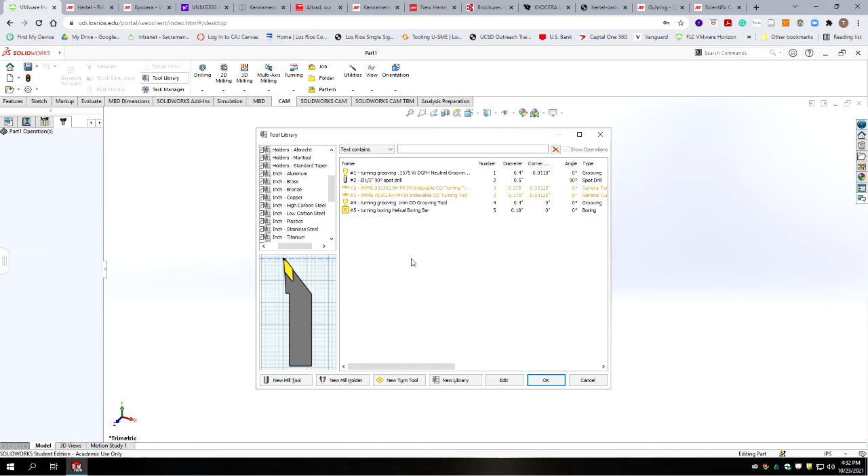So we're going to go back to our library, and we're going to do a right click on tool number 3, and we're going to duplicate that tool. Right now it's giving us an error because we have two identical tools in there. So let's go in and edit the second one.

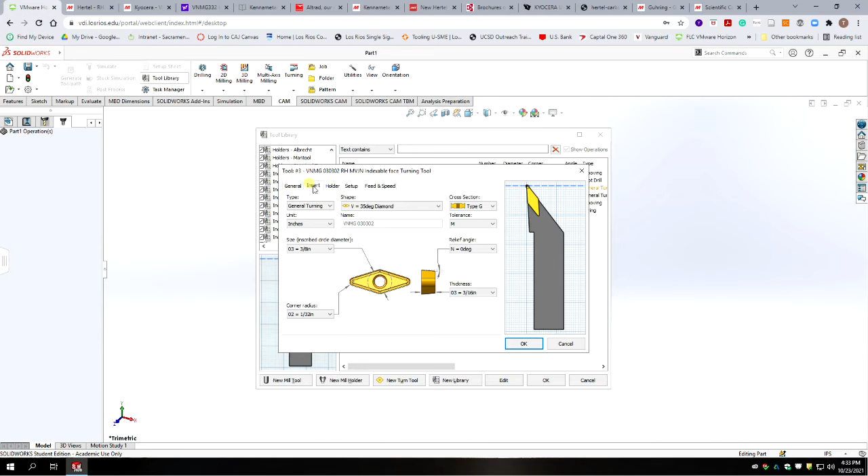We're going to say edit, and in general we're going to call this a facing tool. So face turning tool. Okay, this has got a different name, same part number. We're going to go to our insert, that's going to be the same. The holder is going to be identical.

Okay, and our setup though is we're going to be facing the spindle in this case. And we're just going to leave the feeds and speeds. Okay, now we shouldn't have a conflict there. Alright, so now we want to take that same exact tool and make a left-handed version of it. So we're going to duplicate it, we're going to get our warning, and we're going to go into edit,

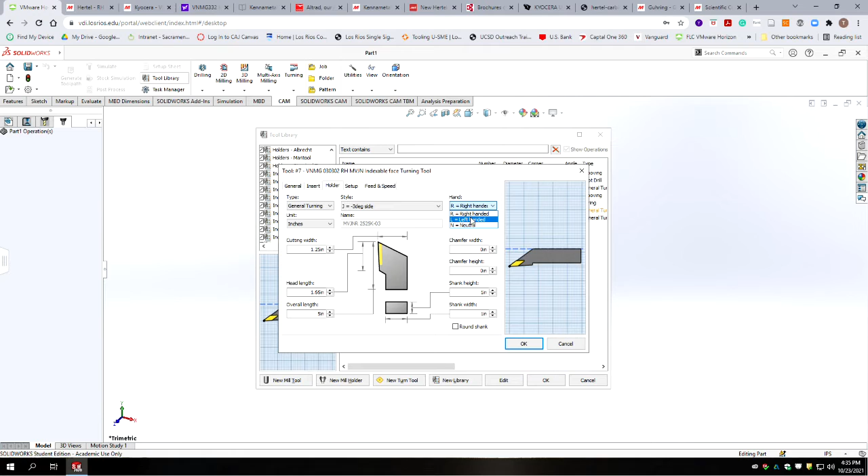and we're going to go to tool 7, and then to the holder type, and we're going to keep everything the same, but make it a left-handed tool instead of a right-handed tool. It's still made by Hertel, but the part number is different because it's a different orientation. So the insert's the same insert, but the holder's different.

So we're going to go back to our tool list and look for the left-handed version. Again, the insert's the same, but we need to put in this number, this one here. We're going to copy that URL and replace this one with it. Actually, the way MSC does it, you could have just replaced the end of it, which is the number, and you would have got the right thing.

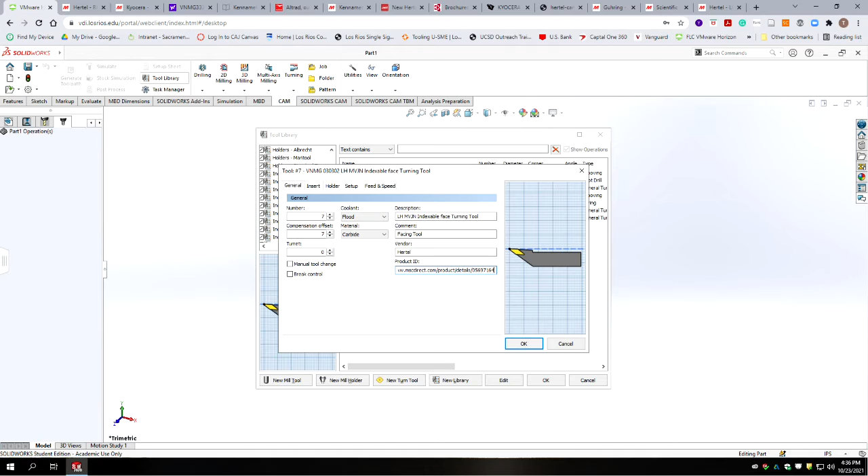There we go. So now we have a right-handed indexable face turning tool and a left-handed tool. That way we can machine features on the face of the diameter. All right, moving on. We have now 7 of these, and we're going to march on to the next one, which is number 8.

Okay, so magazine number 8 is a right-handed outside diameter indexable threading tool holder with a 632 insert. So we're going to take that and go. Okay, so we're making a new turning tool. It's tool number 8, our description: right hand OD threading tool.

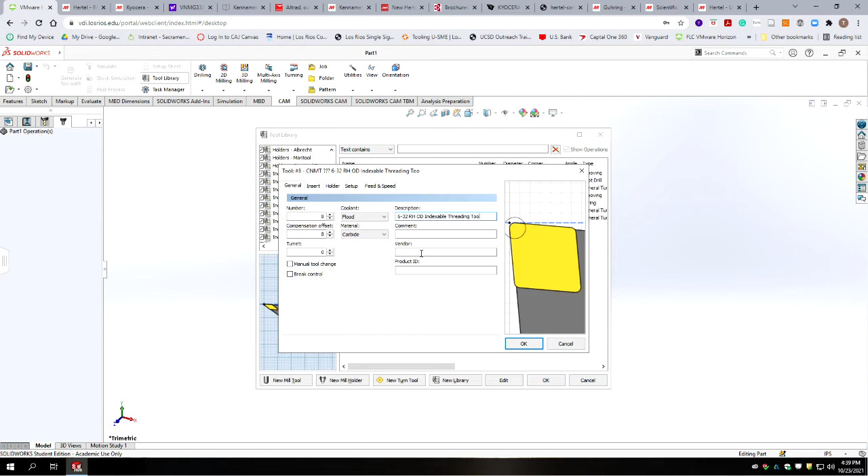I think we should put 632 at the beginning. 632 right-handed outside diameter indexable threading tool, and then we're going to chop off the end of the description. Okay, and the vendor on this was Hertel as well, or Hurdle, however you want to pronounce it.

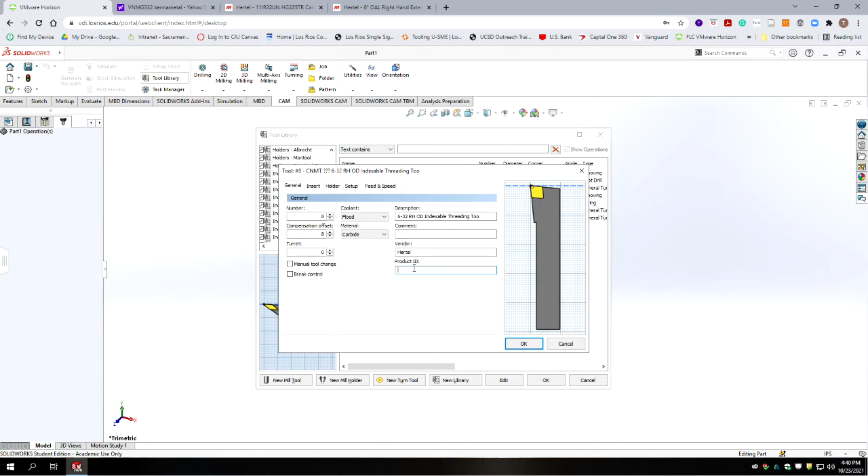So we're going to pick on our tool body, and so this is our tool, and we want that part number to be here. Or no, we're not. We're going to hit our insert. So it's going to be a threading tool. And it's triangular. Okay. So triangular full profile. That's what it looks like.

And our thread pitch is going to be 0.03125. Okay, so we got our insert number. It's the 44174217. And our insert is ISO triangular full. Our thread pitch is 32 threads per inch.

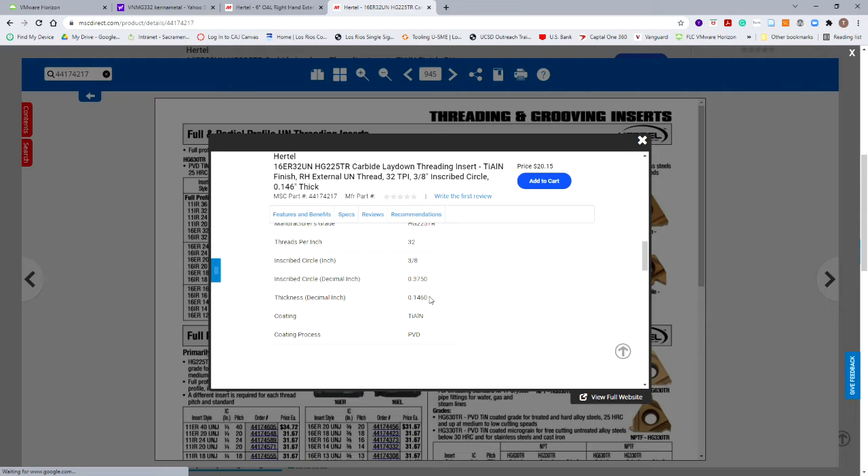And then our inscribed circle, according to this, is a number 16, so 3/8 is the length for L. So that's 0.375. Okay, and our insert thickness according to the catalog is 146 thousandths. Which I would think would also be the width on this. I'm not sure where that's coming from.

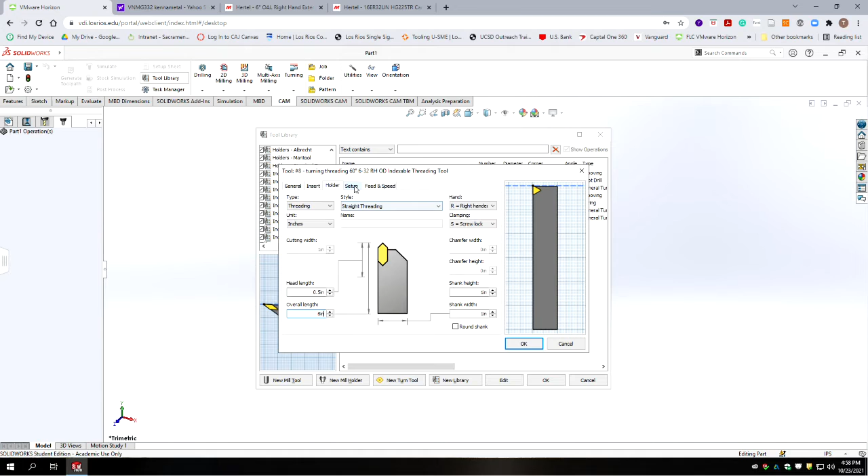Okay, we're going to go to our holder, 1-inch shank. Going to setup, and it's going to be facing as default here. Facing forward. Feeds and speeds. We'll leave that at 500 RPMs. We don't want to go too fast with this for threading.

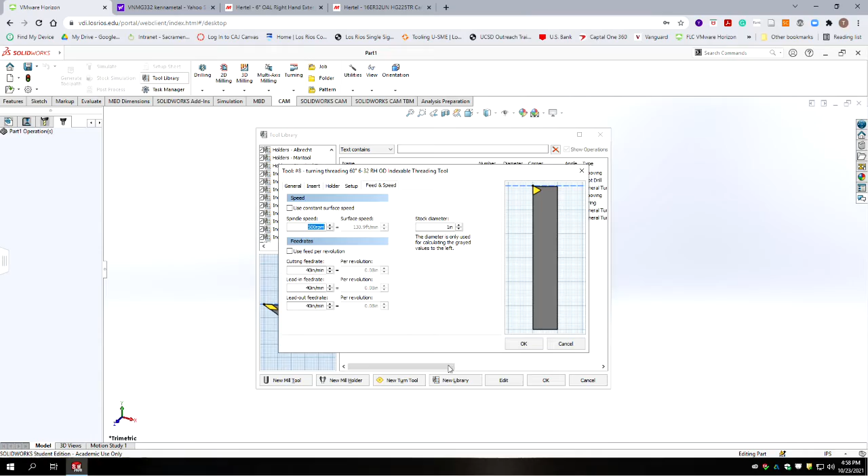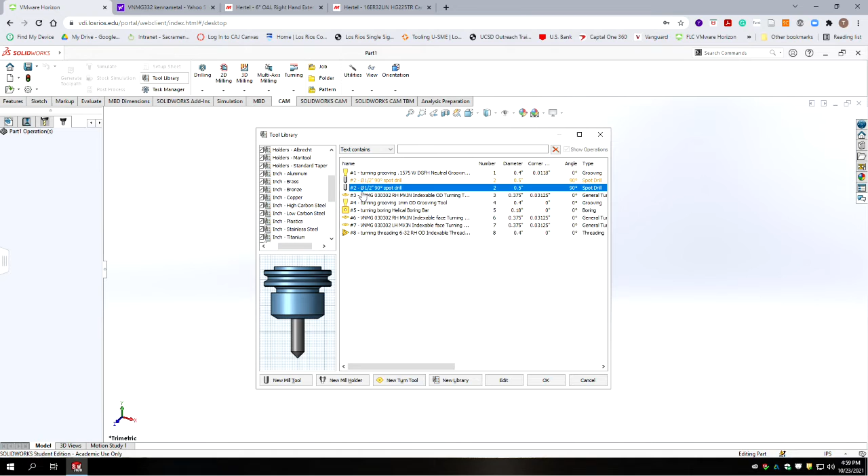So now we're on to tool 9. Tool 9 is, okay, so it's a number 40 drill. Okay, so this is where we're going to start copying stuff. We got a whole bunch of drills. Hopefully it should go faster. They're all going to be held in the same kind of holder. So let's go to our spot drill and let's copy it to be the number 40 drill. We're going to go to our spot drill and we're going to duplicate it. And we're going to edit that.

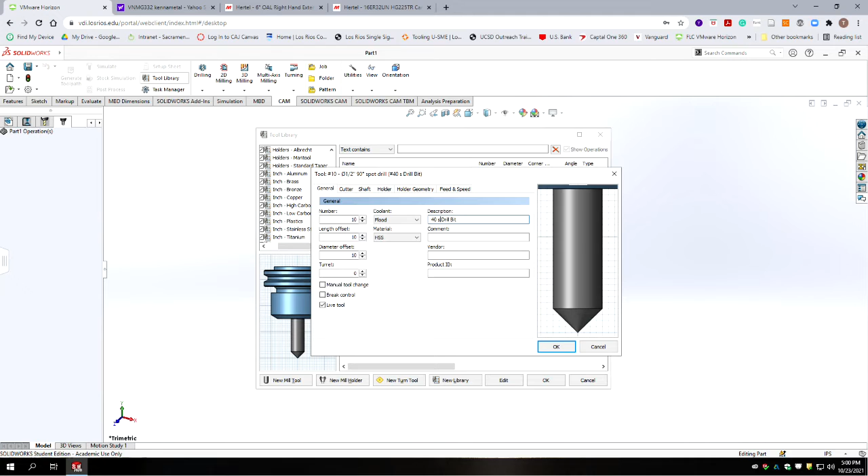Number 40 drill. And we're going to take the material out. We already have that designated. We're just going to say stub length. Okay, number 40 stub drill. We're going to go back to our chart, and our number 40 drill is 98 thousandths.

So drill bit. Our angle is going to be 118 degrees. Our diameter is 98 thousandths diameter drill, which is the number 40. Okay, and we're not going to bother with the part number on this one. These are commodity drill bits, so I have my list, but our overall length is 2 inches and 3/8.

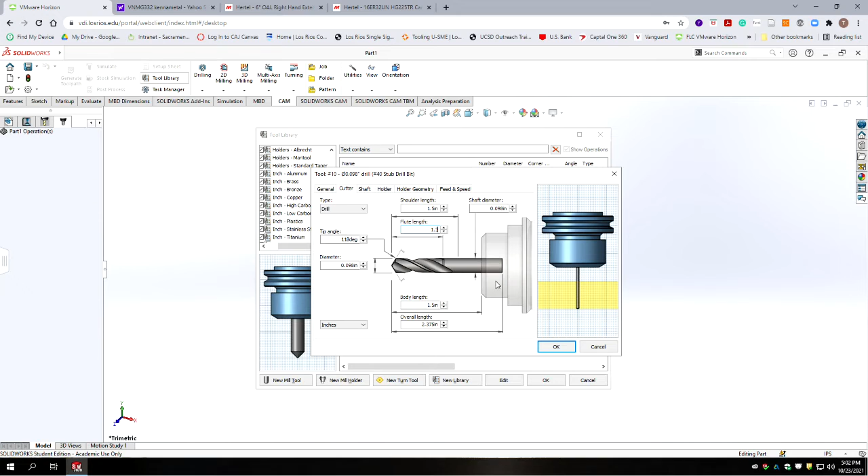3/8, and the body length, I'm not going to change that yet. Our shaft diameter is 98 thousandths also. Our flute length, which would be our cutting length, is 1 3/8. Okay, so for shaft, we're just leaving it alone. For holder, we're going to leave it alone. It's going to use a different collet. Holder geometry, feeds and speeds, we're just going to leave all the same. All right, and this is not a live tool, because it's on a lathe.

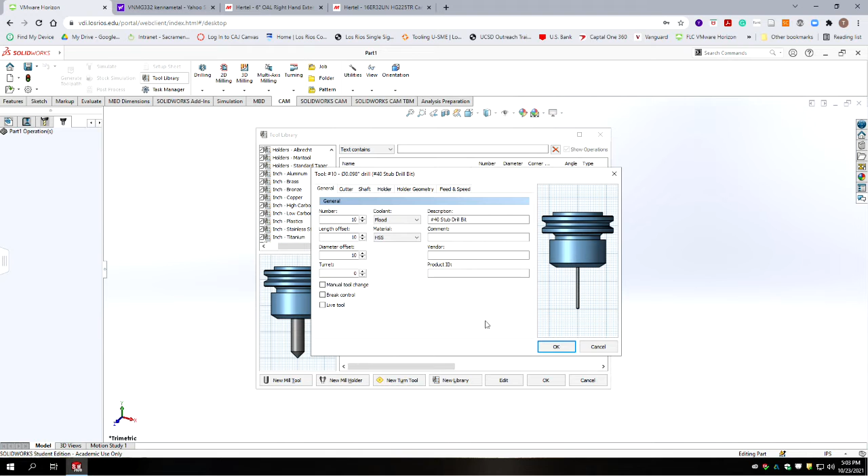3/32. Okay, so the next tool is your 3/32 drill bit. I'd like you to copy the last drill we just did, the number 40, and change the parameters for the 3/32. Should be pretty straightforward. I don't need to walk you through that every step. I do want to note in the tutorial I did make a mistake, and we will not have enough tool positions, so please reference the tool positions that are in the spreadsheet for the subsequent tools. If you do follow the tutorial and get the numbers incorrect, that's okay. Towards the end of the tutorial, I have you renumber them, but it would save you a step.

So the previous tool that was just put in is supposed to be in position 9, not 10. But then the 3/32 is also in position 9. Those tools will have to be swapped out depending on which program is being run. All right. Reference the previous part of this tutorial if you need help duplicating this drill bit. So you can pause the tutorial here to complete that work, and we'll pick back up with the tutorial for the following tool, which is a reamer.

Let's copy this description. It's number 41, 4-flute reamer. We're going to copy that description. We're going to go back to SOLIDWORKS CAM, and this time we're going to do a new mill tool, and it's going to be tool number 12. We're going to go ahead and put in our description, and we're going to take out the material. So high-speed steel. Take out straight shank. Number 41, 4-flute chucking reamer.

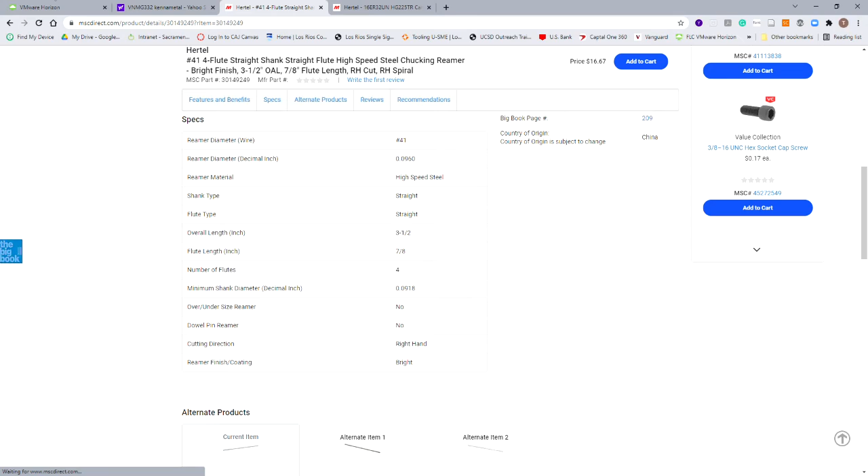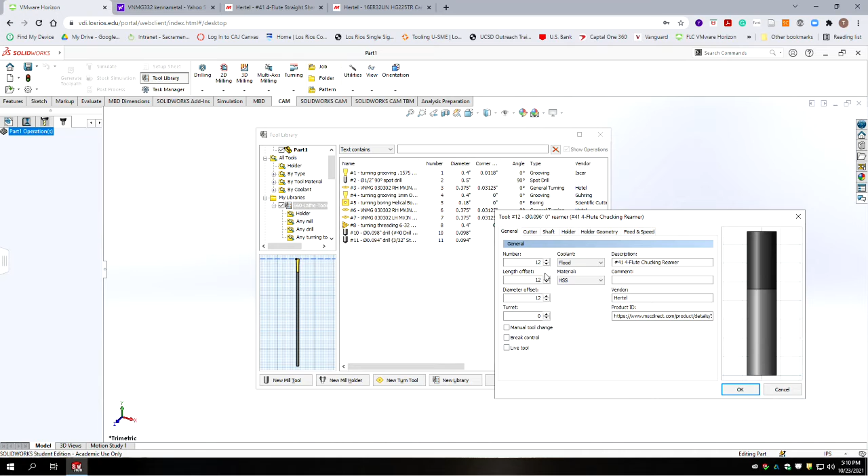So we got our diameter there. We're going to change it to a reamer, so it changes the look of it. We're going to go back to general, and I want to get the product ID. That's Hertel. This is not a live tool. We're going to go to the cutter, and let's put our overall length in first.

So what a reamer does is it goes in after a drill bit, opens up the hole, but much more accurate and a better finish. So our overall length is 3.5 inches. Our diameter is 0.096, and then our flute length is 7/8, which is 0.875. Our shaft diameter here is 0.0918.

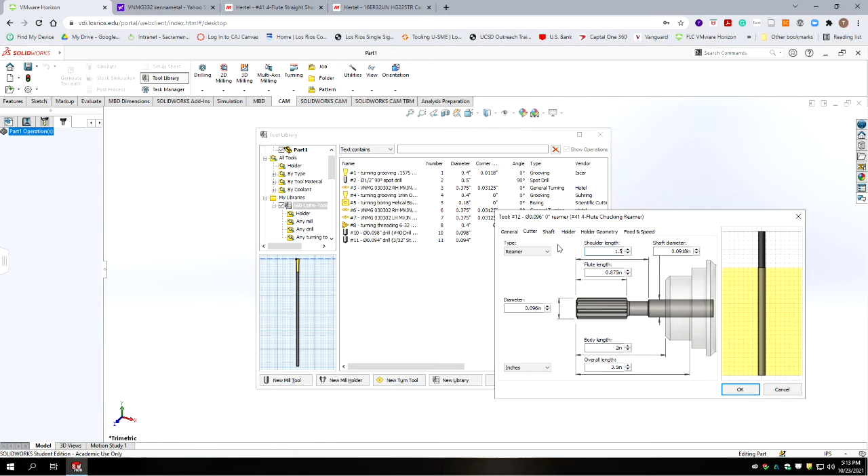Okay, so we got all our parameters in. We're not going to worry about our shaft diameters here. We could add a segment to more accurately simulate this, but we're not going to worry about it. Okay, and then the holder we're going to select is going to be the same one we've been using before, the ER32. And we're just going to leave this at default. It is 4 flutes.

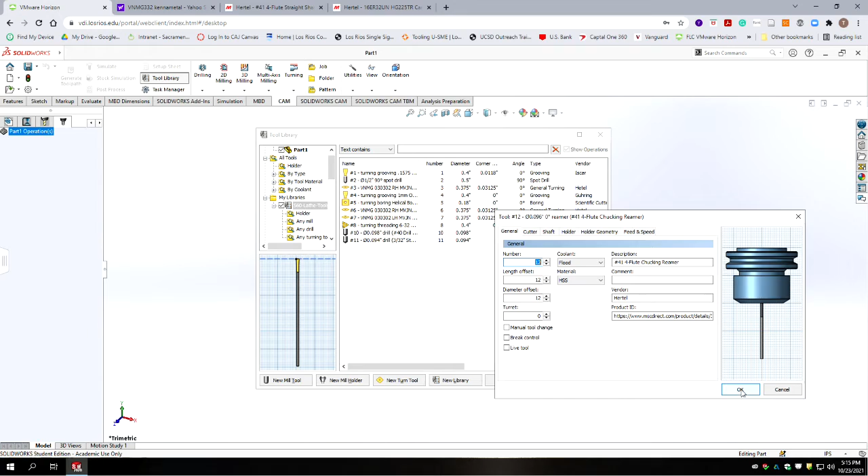Actually, no, I'm going to slow that down. I'm going to slow that into 20 inches a minute. That's not a live tool. It's not spinning because it's in a lathe. Okay. All right. Now we're done with that one.

Okay, your next drill bit is the 7/16 drill bit. I'd like you to copy the last drill we just did and change the parameters. Should be pretty straightforward. I do want to note in the tutorial I did make a mistake, and we will not have enough tool positions, so please reference the tool positions that are in the spreadsheet for these subsequent tools. Those tools will have to be swapped out depending on which program is being run. Reference the previous part of this tutorial if you need help duplicating this drill bit. So pause the video here and pick back up when you've completed the 7/16 drill bit.

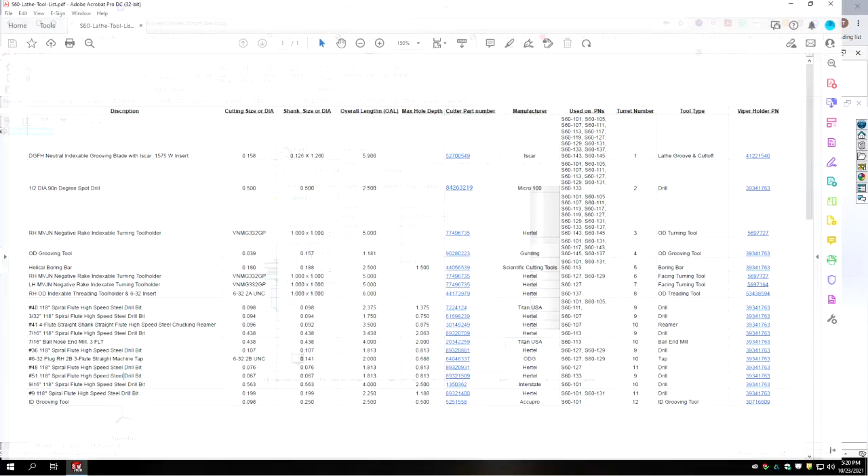Chart, and now we're doing a 7/16 ball end mill with 3 flutes. So let's go ahead and grab that description. Ball nose end mill. We're going to do a new milling tool. We're going to put in our 7/16 ball end mill. We're going to erase the 3 flute off the description. And this is a specialty thing, so I do want to have the correct part number.

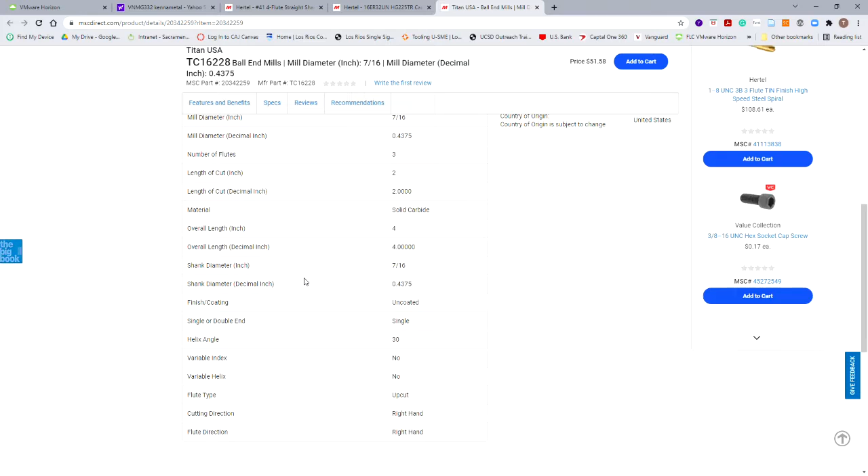Okay, we're going to go to here, and an end mill cuts on all sides but has a spherical tip to it. This is to make our inside radius on the primary piston shell; it's got a spherical end in it. Okay, so we're going to take this information. It's 7/16 in diameter. It's 3 flutes. It has a length of cut of 2 inches, but the overall length is 4 inches. We want this product information, and let's remember that our overall length is 4 inches.

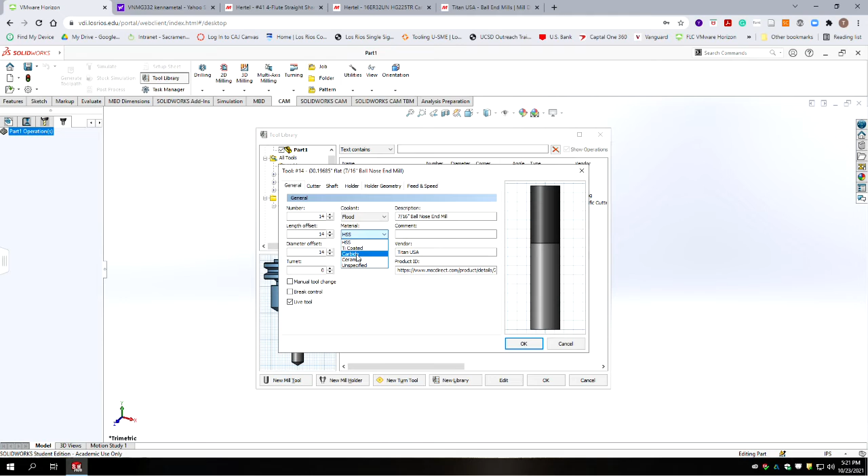And the vendor was Titan USA. And I don't think that's Titan from Roseville. Okay, and then our tool number is 14. And this is carbide. It is a live tool in this instance. We're going to go to the cutter, and it's going to be a ball mill. Our diameter is going to be 7 divided by 16 with an overall length of 4 inches with a flute length of 2 inches.

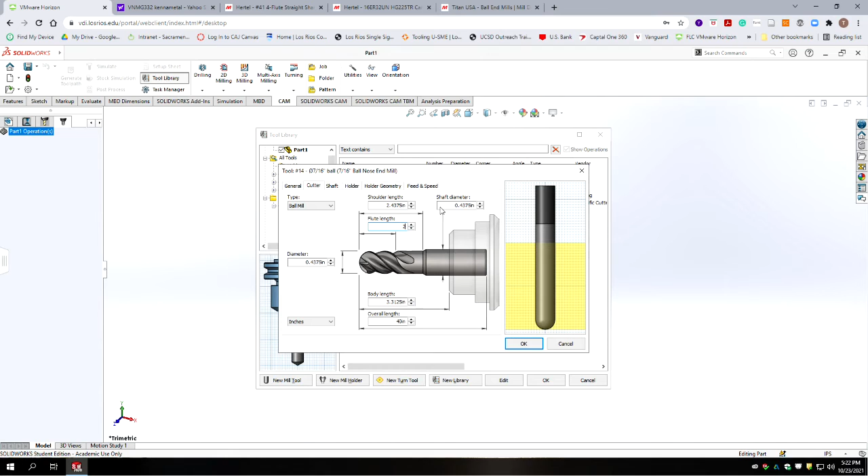Okay, and our shank was the same diameter. And I think we're good there. We're going to leave the shaft alone. The holder, we're going to select that ER32. Okay, and there we go. All right, so now we got tool 14. It's a ball end mill. Again, that's going to go axial in our turret.

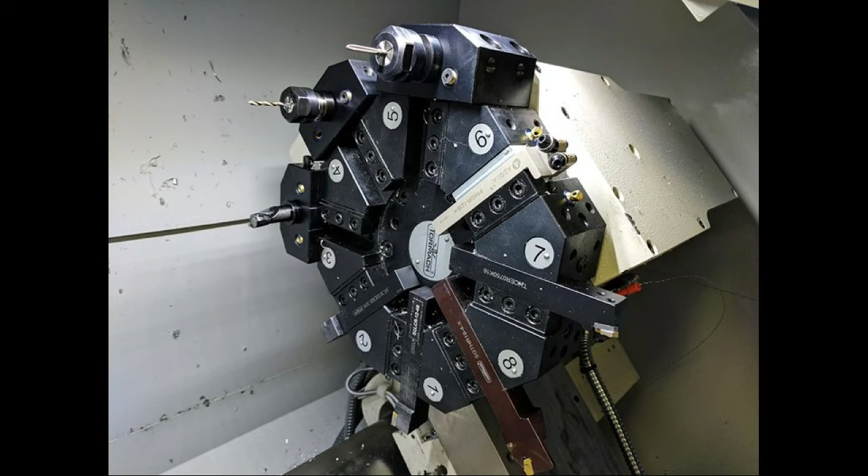Okay, so let's take a look at the orientation of this ball mill. It would be in a position that's axial, so it would be pointing towards the spindle in the turret, similar to tool number 3 in the image. The image is showing I believe a boring bar or a drill, but it would look similar to that in size.

And we need to override something. We need to go back and look at our tool numbers and what turret position they go in. Once we hit 12, we've used up all our magazines. So if you recall, we're going to alternate numbers on here. It looks like we went out of sequence. So tool number 10 is actually tool 9. Let's look at our list. What did we screw up here? 9, 9. Okay, so the reamer is tool 10. Diameter offset is going to be 10, and our length offset is going to be 10.

Okay, so let's double check our work here. So we have number 9, and the number 40 drill is tool number 9. The 3/32 is also tool 9. Okay, so this is going to be 9. And then the number 40 drill is 9, but the reamer is number 10.

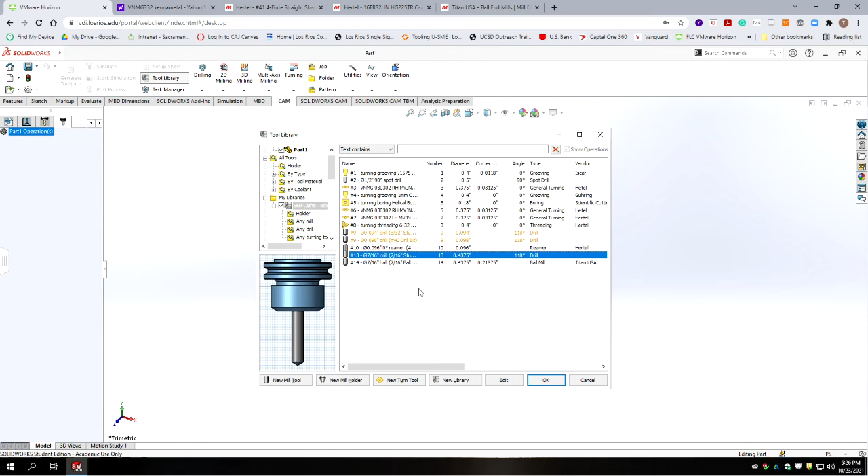So then we're going to go to the 7/16, so 9 and 10. And the 7/16 ball will also be a tool number 10. Okay, it's marking them orange because it's warning you using the same numbers over and over. But in this library, we're not going to be using those tools simultaneously in the machine. So provided we load the correct tool in the machine, our programs will match.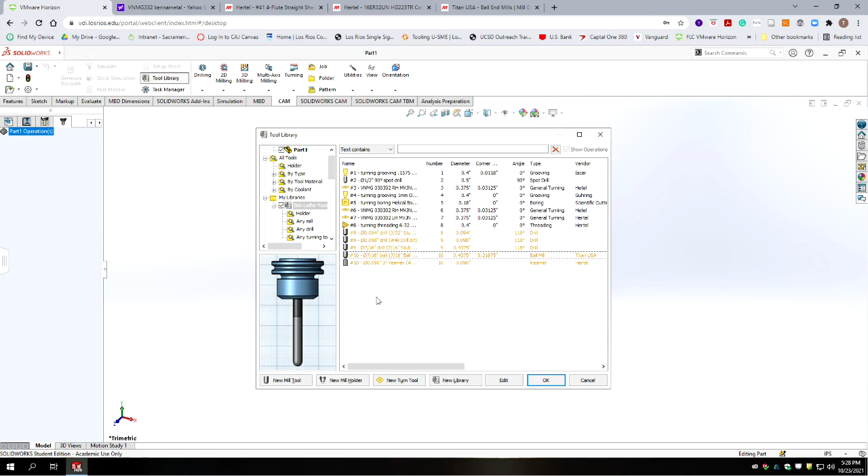So we only have 12 positions in our turret. Okay, so sorry about that. Now we're going to move on to our next tool. Okay, so we have another drill bit to make. It's the number 36 drill, and that will be the tap drill for the 6-32 thread we're going to do. So I'd like you to stop the video here and copy one of your previous drill bits and change the parameters to match the parameters for a number 36 drill. And then you can return to the video for the next tool, which is a 6-32 tap.

The 6-32 plug tap. So let's highlight all of that, and that is going to be tool number 10. So we're going to do a new mill tool, and it's going to be a right-handed tap. And we're going to go to general, and it's going to be a tool number 10, high-speed steel. Put in our description, 6-32 plug, right-handed tap. So we're just going to put 6-32 machine tap.

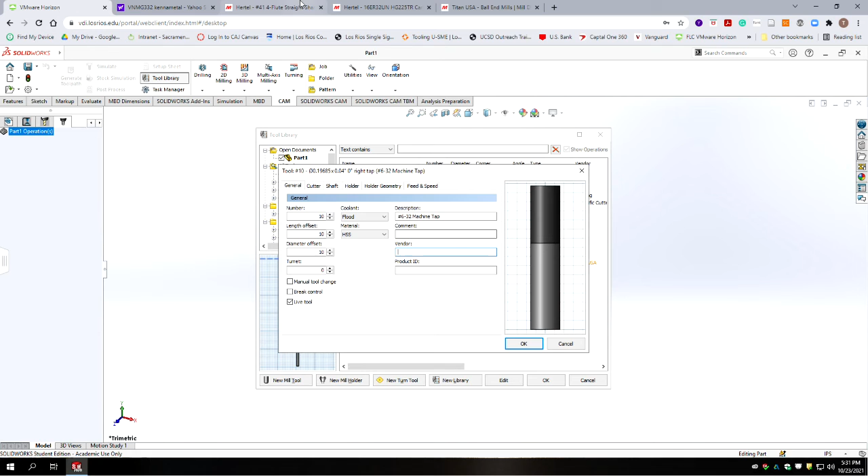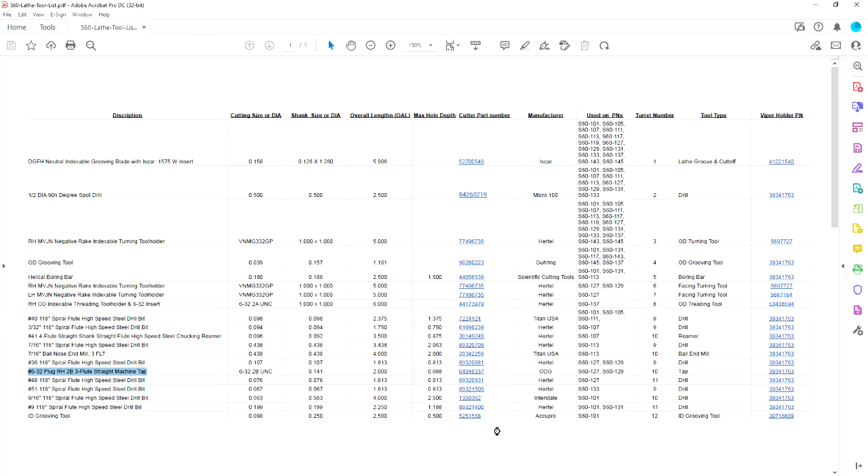We do want the vendor, which should be OSG. That's actually wrong, but we'll go to the information on the actual tap. So the company is OSG, and the product ID is there. There's our product. Our cutter: the major diameter is the same as a 6-32. So the major diameter on a 6-32.

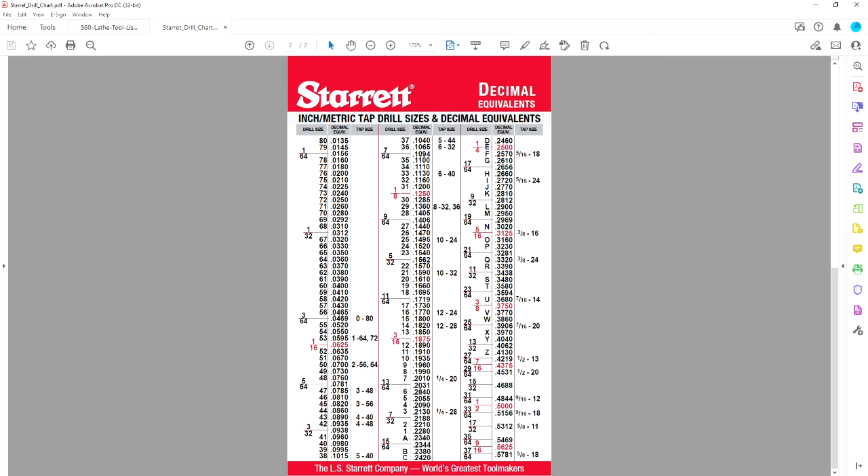Okay, according to our handy dandy drill chart, a number 6 wire is 0.204. Our thread pitch is basically 1/32 of an inch at 32 threads per inch. Our overall length, according to our catalog, is 2 inches. Our flute length, or cutting depth, 11/16. Our shaft diameter is 141 thousandths.

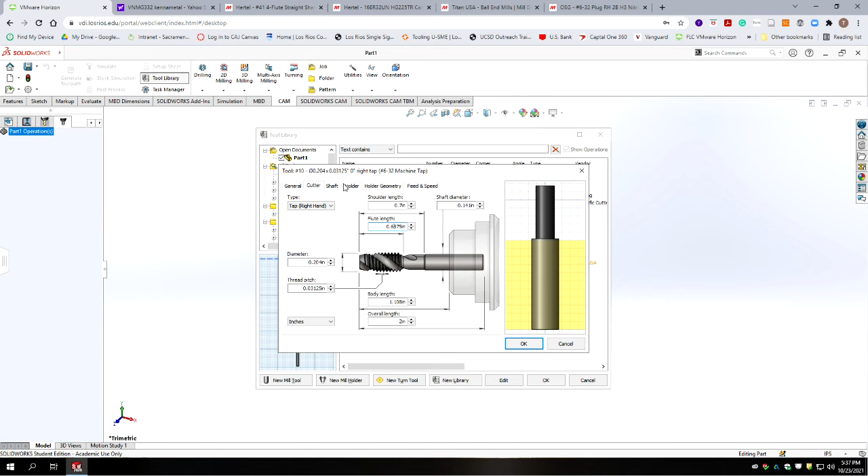Okay, so I put in 0.7, a little bit more than the flute length, for the shoulder length. I don't think it's worth going in and adding to the shaft to make it look more like a tap, but this is what it's going to model as. In our holder, we're going to again select that same ER32 holder. So it's a Maritool CAT40 ER32 1.85 gauge length. Okay, and then there's our holder.

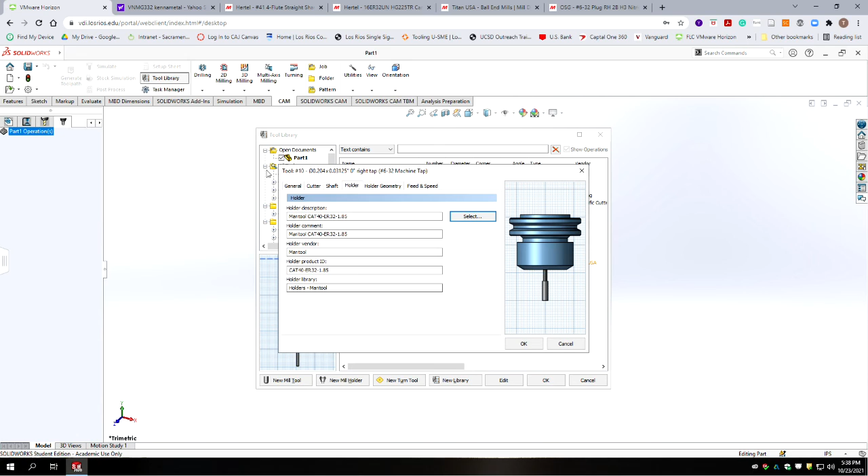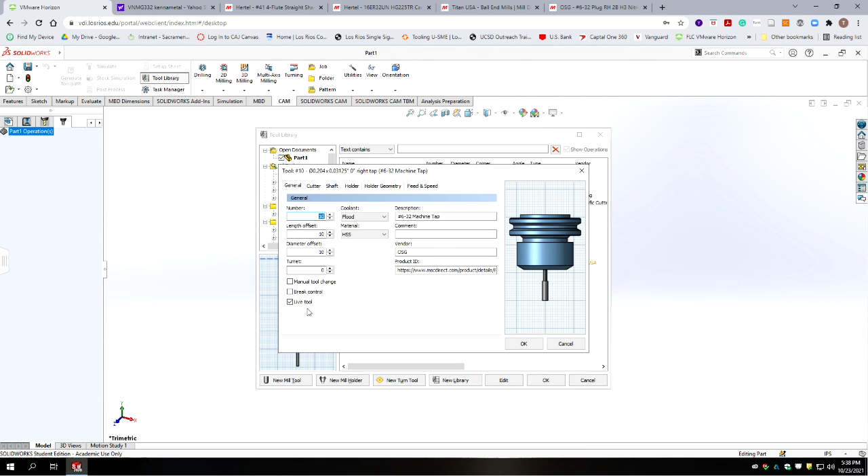And the feeds and speeds should auto calculate based off the actual tap cycles. Although 5,000 RPM is a little fast, that scares me for a tap. So let's put in 1,000. I don't want to see it go any faster than that. Alright, so we got tool number 10, it is a live tool, and we're going to hit OK. Alright, so we've got a lot of tool 9s and tool 10s, and now we're going to move on to what our next tool is.

Okay, so now we have a series of drill bits. So what I would like you to do between this video and the next video, before you go to part 4, is to generate the drill bits for the number 46, the 51, the 9/16, and the number 9. You should be able to reference the prior tutorials on how to copy those, and make sure you reference the turret numbers that are on the spreadsheet, and you should be good. And then the very last segment, which is part 4 of this, you'll build the inside diameter grooving tool. See you in the next video.